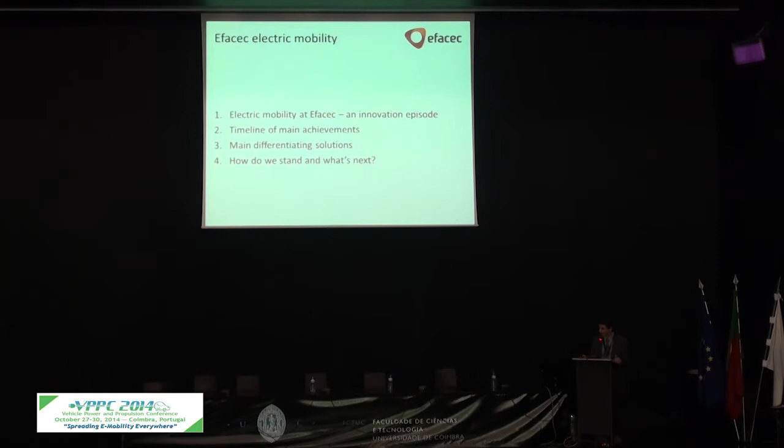So this is a summary of what I will present. First, the history of EFACEC, why we are where we are now. Some achievements, some solutions that are available for the market today, and some of the areas where we are investing more and pursuing more innovation and evolution on the technology side and on the offer for the market.

Okay, just some brief words to start. At EFACEC, we see innovation as a value creation. When there is a change, when there is something that allows you to bring new things for the market, that bring value to the market and help the market to develop, and also that bring value to the company, which I think is very important because it's what this industry today needs. I think we are now passing the phase where it's more academic and pilots and trials, and for the mass adoption of EVs, I think it's obvious that we need to turn this into business and into real economic activity.

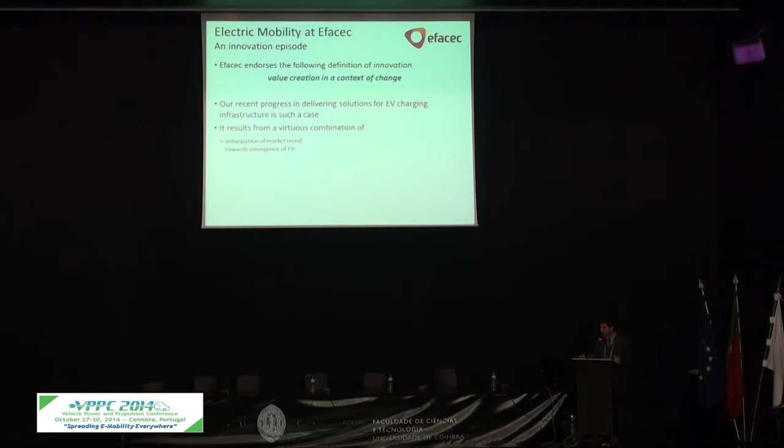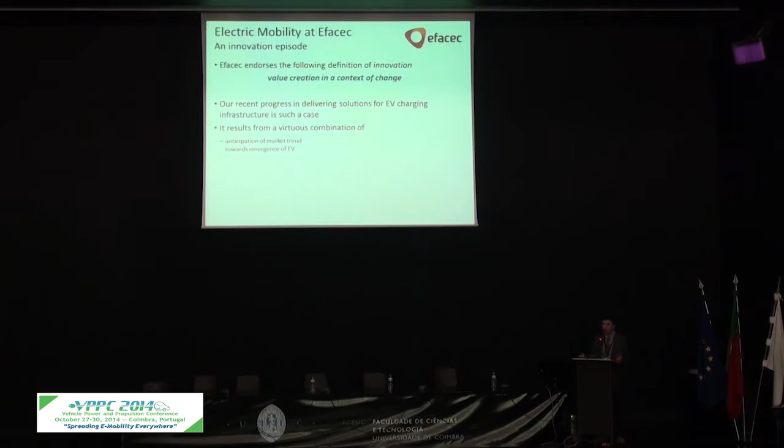So this is one of the cases where we apply this concept, and there is a combination of some facts that led us to where we are now. First of all, an anticipation. So we started to believe that EVs can be an activity with future and that can have good growth. We have an active knowledge management. That means we have a lot of knowledge in the company and with the partners that we work, and a lot of experience in working in this kind of technologies for other purposes, of course.

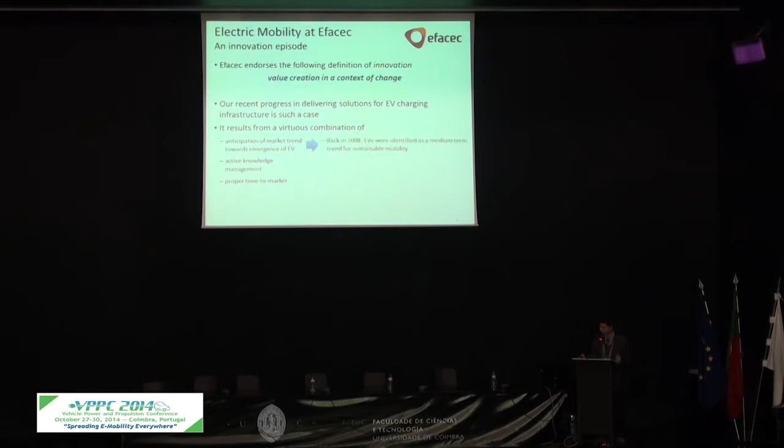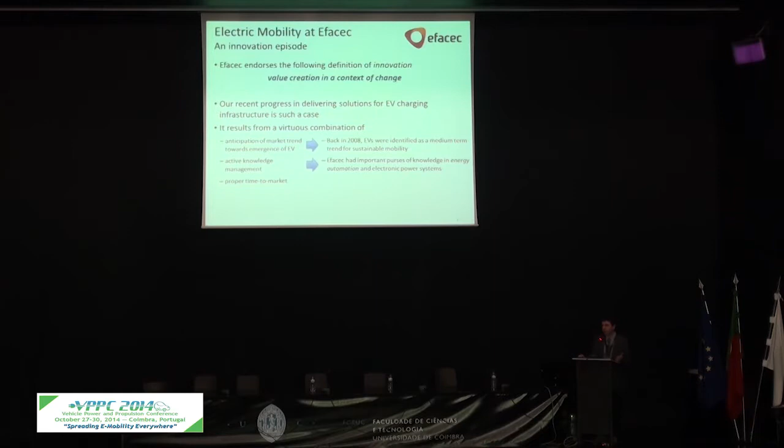Also the proper time to market, so I think we were able to put the products in the market in time, and you will see some examples where we have been the first ones in the world to introduce certain things. And the concretization of this is that we started in 2008 conducting studies on what could be electric mobility. We have an important asset that is all the knowledge and the know-how that we have in the company, mainly in power electronic systems.

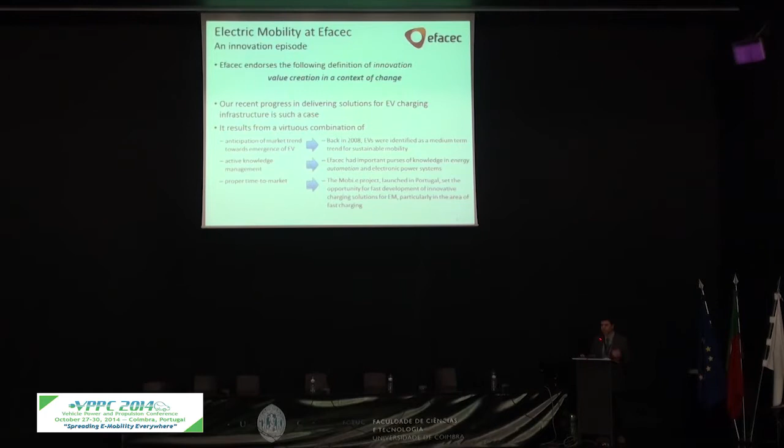And there was a good opportunity in Portugal, which probably some of you know. It was a pilot project that started in 2009 under the big name of MobiE, the brand that was the name of the project, the name of the network, and the name of all the electric mobility program in Portugal. With the combination of all this, EFACEC was able to capture this and to be now present in several areas of the world, as you will see.

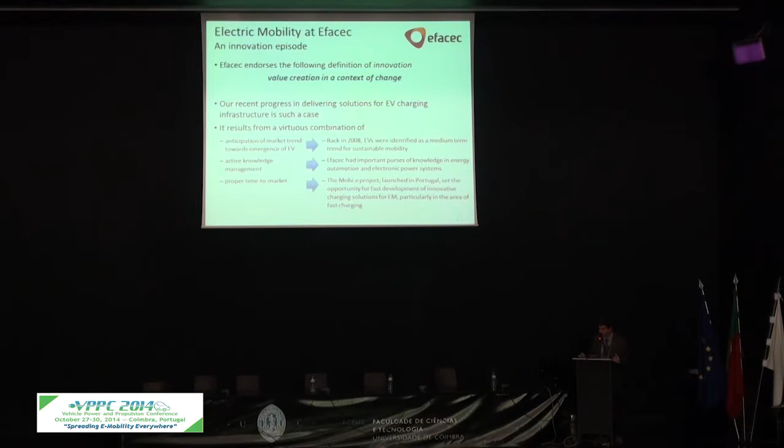So let's start. Back in 2009, part of the MobiE project was the build-up of a system, of a pilot network and a management system, and all the way how this system would work and the model for the market and so on. And this was conducted by a consortium of companies that implemented this pilot project, of which EFACEC was the technology partner.

Just put my glasses. Okay.

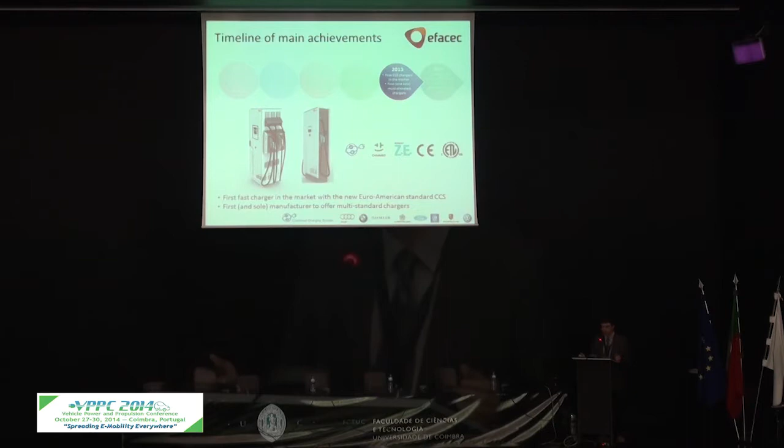So this is an example of a charger with, in this case, 3 outputs, because besides this dual standard fast charging, it has also 3-phase AC output that some cars use. And in 2014, we have a complete range of products to serve different applications, from private charging to public charging, different powers, different standards, DC, AC. So you see a complete range, which is again probably one of the most complete ranges in the market today.

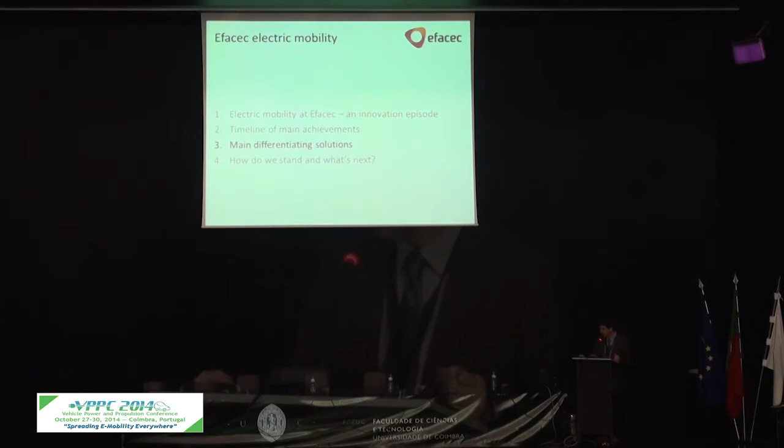Okay, what are the main differentiating solutions that we offer for the market in this area? You see here a full range of chargers. You have from 50 kilowatts down to 3.7 kilowatts on AC, DC, single phase, with management or without management, all different flavors for all the different applications.

We have a strong bet in DC. We have, of course, the AC range, but with AC, you have many companies doing AC. You don't have so many companies doing DC chargers. And so we have a strong bet on DC, where the competition is less, the sophistication is higher, and we have a very, very strong position in the market, and probably we are the number one, or one of the two number ones in the world in DC fast charging.

Just for you to understand, probably you know all this, but I will just recapitulate this concept. Practically every car in the market has an onboard converter from AC to DC to charge the batteries. And so most of the electric vehicle supply equipment, that's the official name in the standards for the chargers, what they do is control the flow of power. So they don't convert anything, they just control the flow. So these equipment are, of course, in terms of technology, more simple than the other ones. The question is that this onboard converter can be expensive, can have some weight and occupy some space, and so it tends to have a limited power.

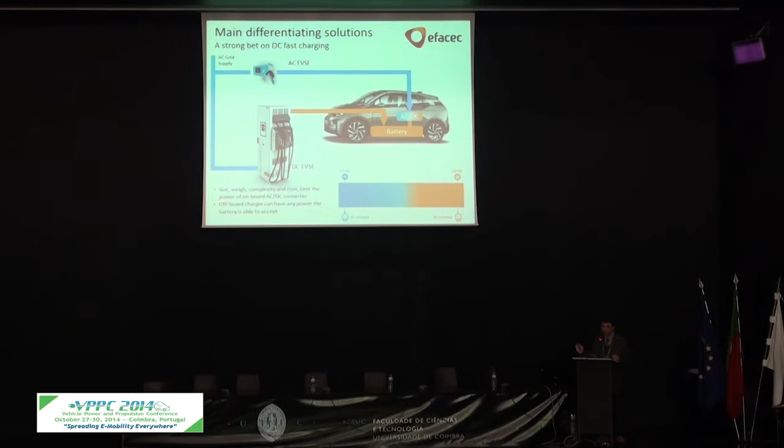And this is how we charge the battery. Of course, you can overcome this by having an off-board converter. So you can put more power in the battery and charge it faster. So the concept is very simple: you put a big converter outside of the car and charge the battery directly. So this is basically the principle of DC charging, and why all charging above a certain power tends to be DC for most of the car manufacturers. There's one car manufacturer that doesn't use this concept, but most of the others use this concept, which is simple: you start with AC for low powers, and somewhere in the middle you change and use DC.

Okay, these are examples of other differentiating solutions. The integration with energy storage, the integration with renewables, all these are areas that we work in, and that can also minimize the impact of the chargers on the network, and even sometimes help the network, because if we have a stationary storage, it can be used for other purposes than just to charge cars. And we have several projects. This is just an example, but we have other projects that involve the combination of stationary storage with car charging.

We also believe in open systems, so our chargers can be integrated in practically any network in the world. If it uses an open standard like OCPP, or if it uses a proprietary standard, it doesn't matter, we can implement it. So the way we position in the market is to be completely open on this. Again, this is the differentiating aspect from some of our competitors that impose a certain interface or impose a certain connection to their own cloud. We connect to the management system of our customers.

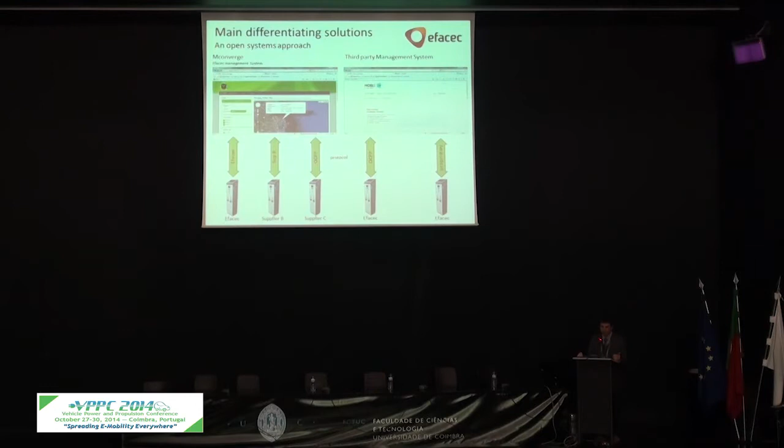And you have here two examples that work in both ways. On the left, you have our management system that can control chargers from other manufacturers. On the right, you have other management systems. In this case, it's MOBI.E, but it can be any other management system, where our chargers can integrate using different protocols. This is the most common, and we are doing this all over the world.

Again, going back to the multi-standard that I presented before, you have here a simple concept of a DC charger with the CHAdeMO standard. You can identify basically 3 blocks there. You have the power electronics, which is basically something that converts the AC into the voltage and current that the car wants. You have a controller, and you have HMI communications and high-level management. And you have internal communications between all of these blocks.

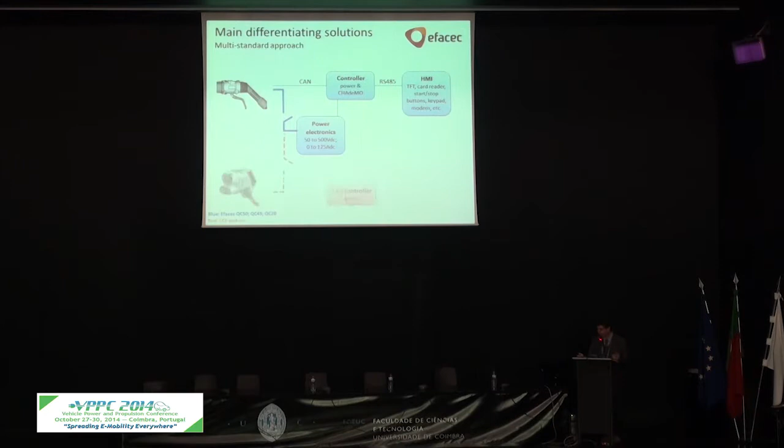So to have a new standard, what we did was simply to add a second output and a new controller connected to the central controller that we already have. So we can choose, using the same power electronics, to use one or other output. We just use different controllers to implement different interfaces with the vehicle. And we have, of course, an internal communication between these controllers.

So for us, it was more or less fast, not only to deliver the new standard, but also to propose the dual standard, which was something that when we proposed this for the first time, nobody believed it was possible, because the standards are so different. We got feedback from many people when we presented this in an exhibition in the United States in 2012. Many people were coming to our stand and saying that you are showing something that is impossible to do. Well, it's possible, and it's working, and it's in the market for more than a year now. And most of our competitors are now coming with this solution also.

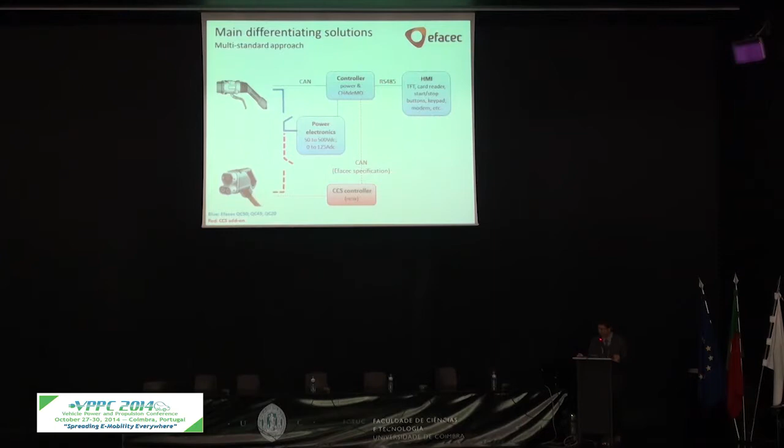Of course, this brings an important advantage for the market, as we believe. That is the possibility to have retrofit on existing chargers that were using the first standard. So, for you to have an idea, a CHAdeMO charger costs roughly the same as a CCS charger. So in terms of investment for the network operator or the owner of the charger it is more or less the same. The revenue that you get with a CHAdeMO charger by charging the cars that are compatible with that standard can be a certain amount per year or per month, doesn't matter.

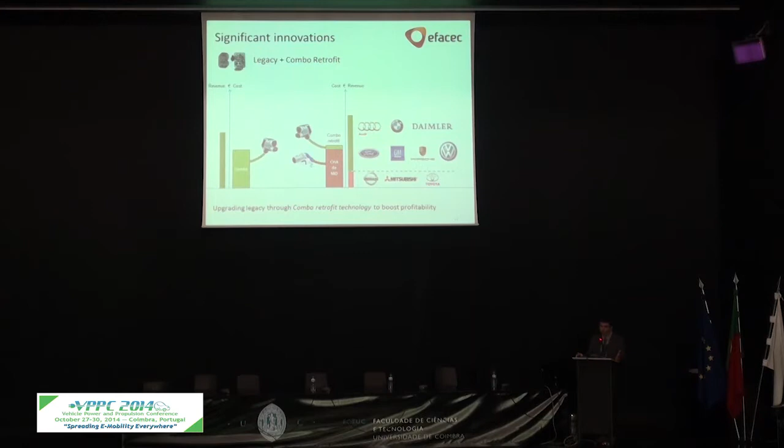The other cars that are using the CCS standard, which are more brands, can bring also some revenue from that charger. But if you combine both, which is if you go to a CHAdeMO charger and you add the CCS charger to it, you will have both revenues combined with much less investment. So this is a good rationale, and I think we were able to convince many people of this good thing of combining the two standards in a single equipment.

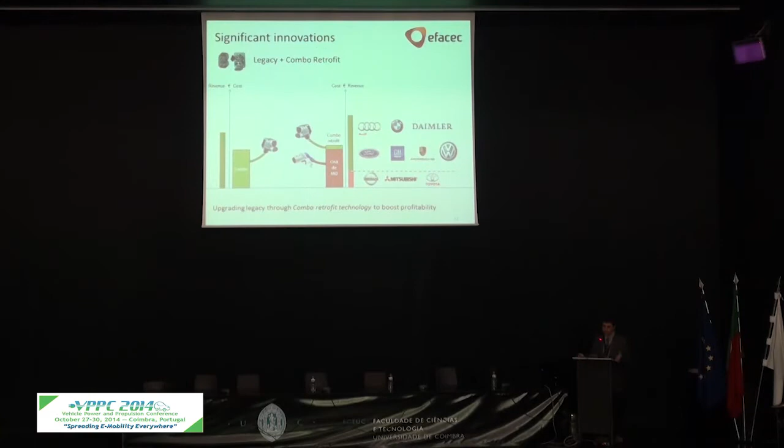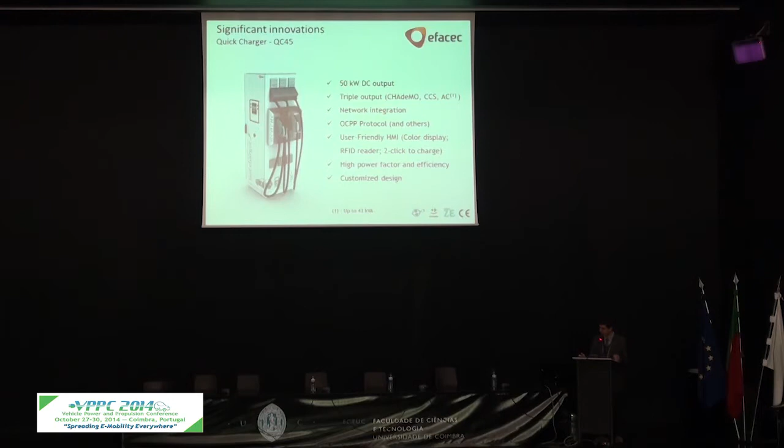And I think it's now completely accepted in the market, and it's even recommended by many people. The discussion was even there for the new CPT directive, where it is stated that you should have CCS in Europe, but it doesn't exclude the other, because you can just combine in the same charger and not exclude the possibility to charge cars that are not compatible with CCS. So this is an example of a 50 kilowatt charger that is in the market, and we have at the moment around 500 units already working in the field in different continents with the combined standards, multi-standard.

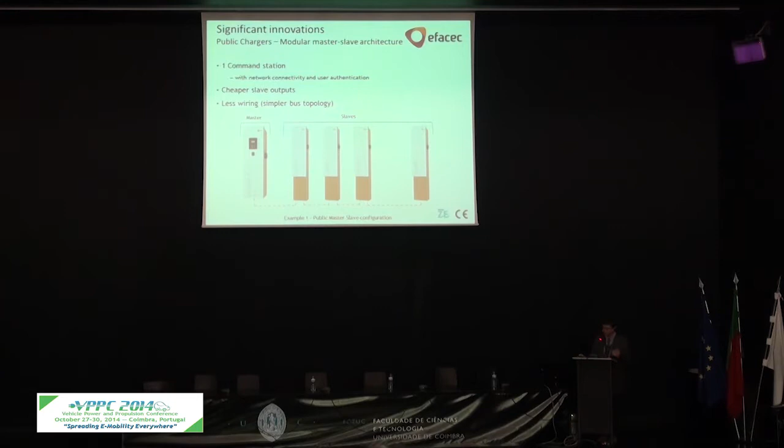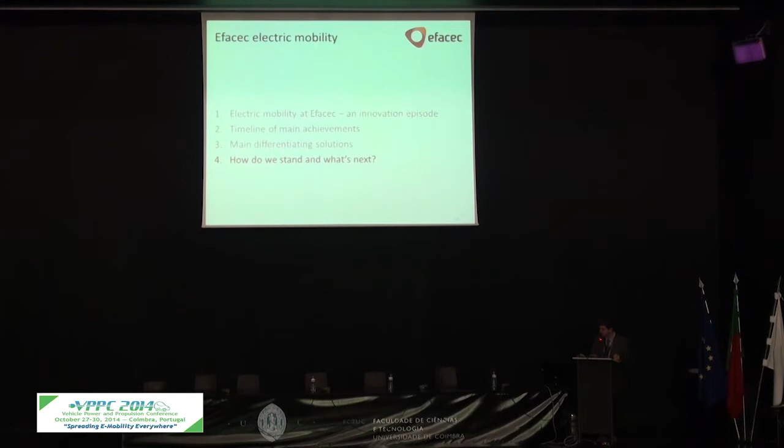Again, an innovation that we developed is to have chargers with the master-slave concept. So you don't need to replicate everything in each charger. You can have a user interface, communications and database and everything in just one station, and then you have slaves or satellite stations of this charger, which is again a good driver for the rollout of different charging stations in a certain area at a lower cost. So another example of master-slave. Just some examples of combination of different equipment in this master-slave configuration.

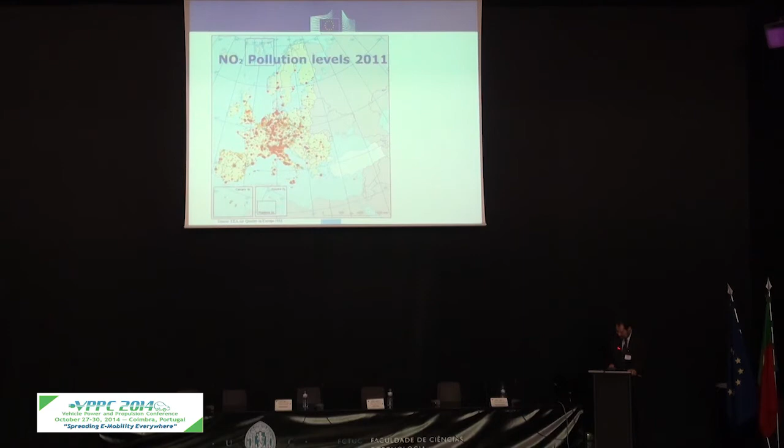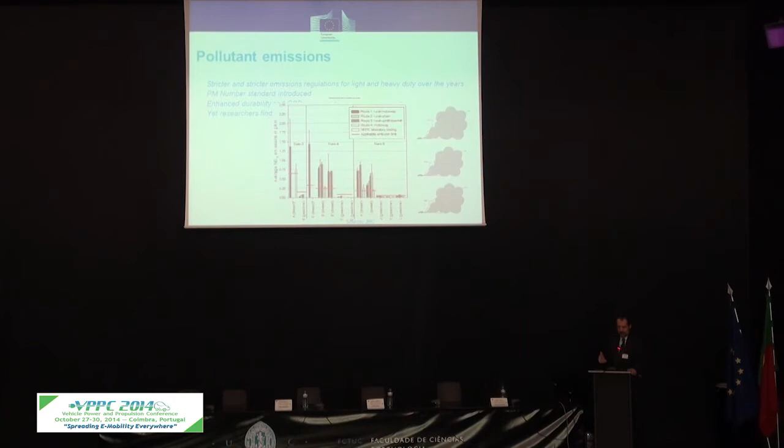So we have to take into account all these things and take into account reality, because sometimes, I am an engineer, but sometimes we have the possibility of losing track of what's going on. So reality in pollution, for instance. This is a map of 2011, it's slowly improving, but I think it's not changed a lot. And we see that we have tried to have stricter standards, we have introduced particle number standards and so on, but still we have proof coming from many tests that the vehicles are emitting much more than they are supposed to, and than they do on the test bench when they are certified.

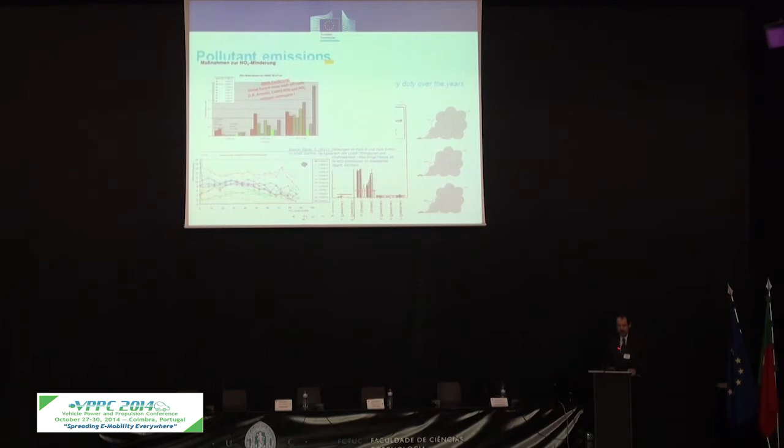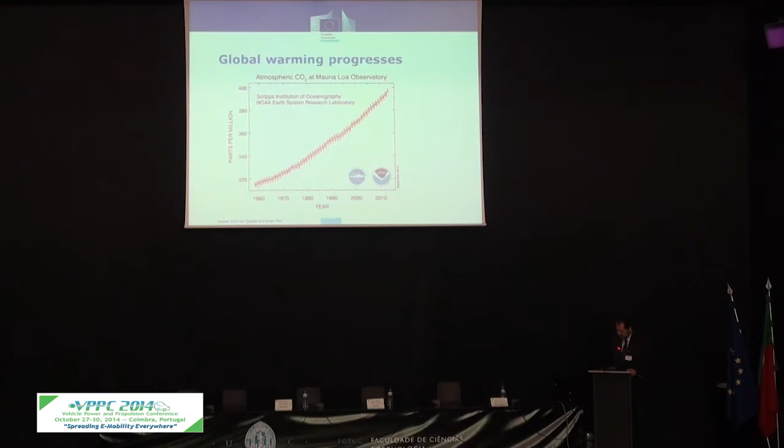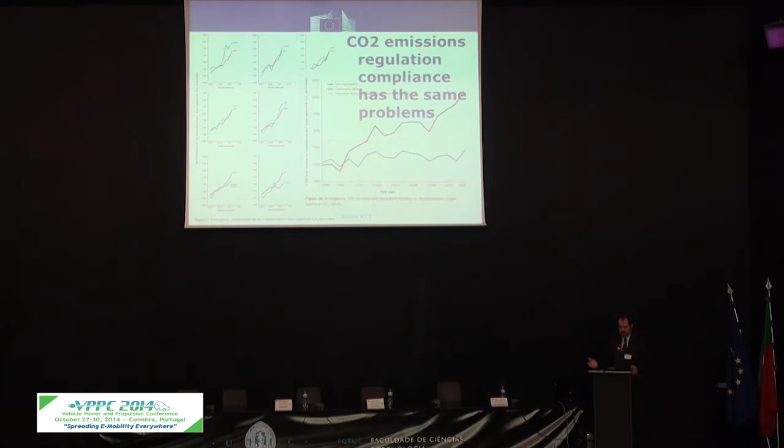So, for sure, we have to introduce real driving testing to make sure that we cover as much of the engine map. At the same time, we have global warming issues, and also there we are trying to put regulation on CO2, and also there we see that there are discrepancies; you see, the difference is increasing with time. And this has been discussed in the press for a long time. These are just a few clips from several magazines.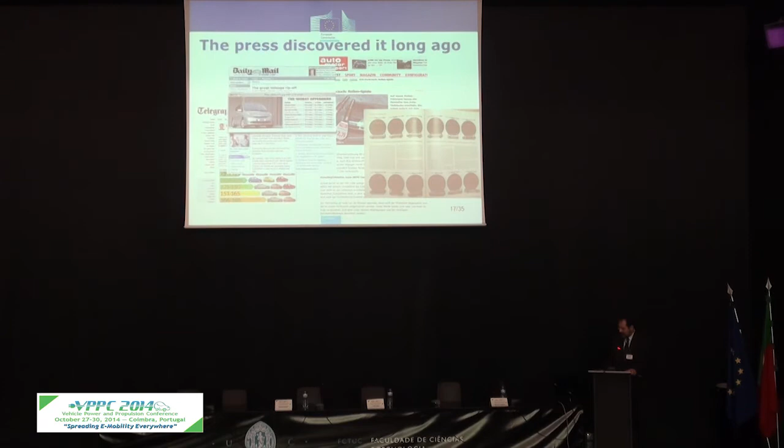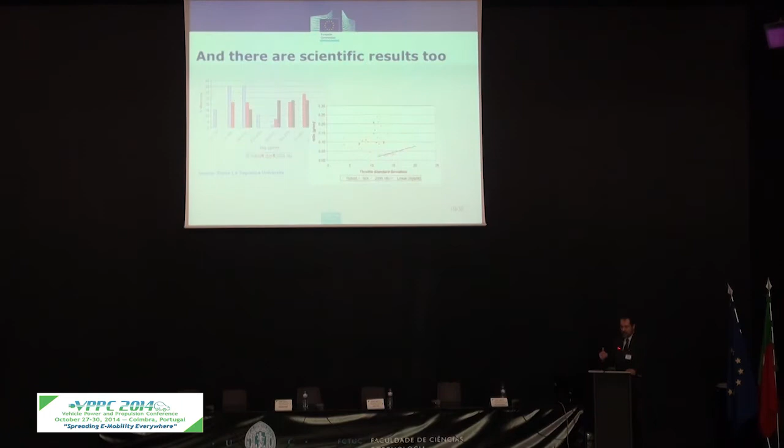But basically, the answer was, okay, yeah, because people are driving differently. Yes, that's true. We've had also some scientific tests showing this, that people are driving in many different ways. But for sure, the differences are getting worse.

So the problem for the industry is that the consumers are starting to react. So we have class actions. This one has been recently launched, so I don't know how many are aware that one has been launched in Europe, while in the US and Canada this has already taken place and they won. So these issues, these discrepancies will have to be taken into account.

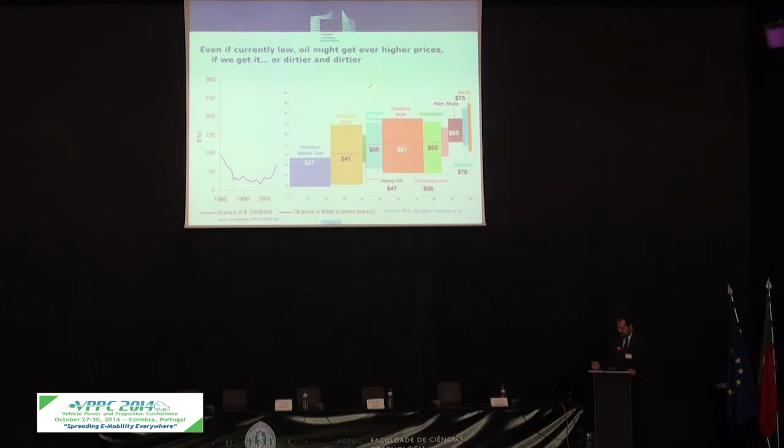And then we have oil. Oil at the moment is going down because of the crisis, because of certain things. But for sure, this graph on the right shows that the oil that we are using today is dirtier and will be in the future dirtier because the easy oil is already being used. So when we do, for instance, the CO2 calculation, I've seen papers on some issues, and I see standard numbers used, which are not realistic.

The oil of tar sands or the shale oil that is so successful in the US takes much more energy to be extracted. So the CO2 emitted when you use it is higher. And probably the more we go into this enhanced recovery, as they call it, the worse the CO2 footprint will be. And of course, probably if the consumption goes on, the price will be high because already at the source it's more costly.

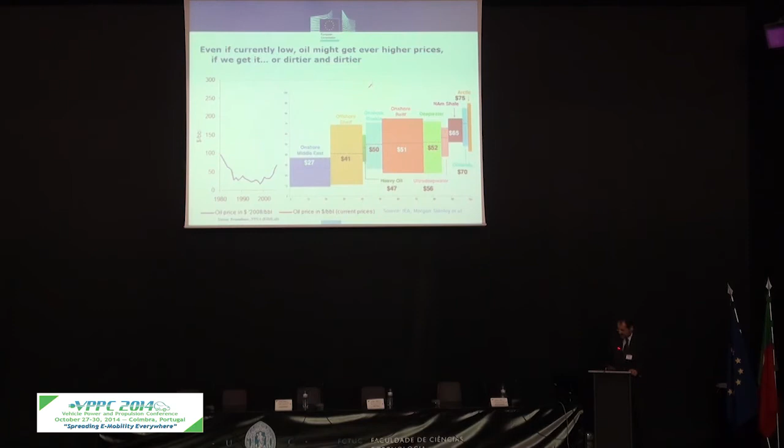So I mentioned competitiveness. Yes, we have European manufacturers which are among the leaders. Basically, in Europe, there are manufacturers that have several models, while many other manufacturers just have a flagship model, and that's it. So in a way, we are, I think, ahead on this. Some of this led to expansion in China. So even if we have models for the European market, there are specific models in joint venture in China. So opportunities for the future.

But at the same time, we look at the sales, and I hear important people saying, disappointing sales. Yes, I didn't expect anything different, frankly speaking. This is a change that really needs a change of mind of the customer. Of course, as has been mentioned, it is a costly technology to start with, like almost all new technologies are costly at the beginning. But in this case, you also have your customer change their way of thinking, of using the vehicle. So to me, it's not a big surprise.

And if I look at the trends of hybrids, for instance, which were an easier sell, basically you drive them the same way as you drive any other car. So they didn't require, other than the additional cost, a big change for the customer. Whereas here you have to think about charging, fast charging, a use strategy, which is something you were not used to thinking about and takes time to accept. So from this point of view, I see this as a more or less normal thing. Of course, we have to work, we have to improve, but again, we have to take into account reality.

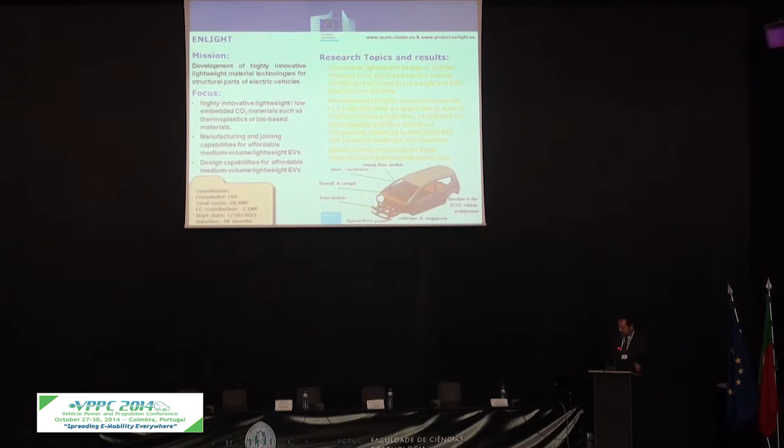Then of course we have looked in several projects at making the vehicles lighter. We have outside a composite car. That's a costly approach. Of course, we have projects like this which are trying to reduce the cost. We have other projects trying to have a compromise between cost and materials and production run, because some materials are giving you good weight reduction, but sometimes you have to either slow production rates or you have to invest a lot in manufacturing facilities. So we are funding several projects to try to get a better compromise.

We have several things on trucks. Most are on conventional trucks because fully electric, particularly for long range, is a bit far away. But we have hybridization, for instance, like in this project, which would in any case help in improving the efficiency.

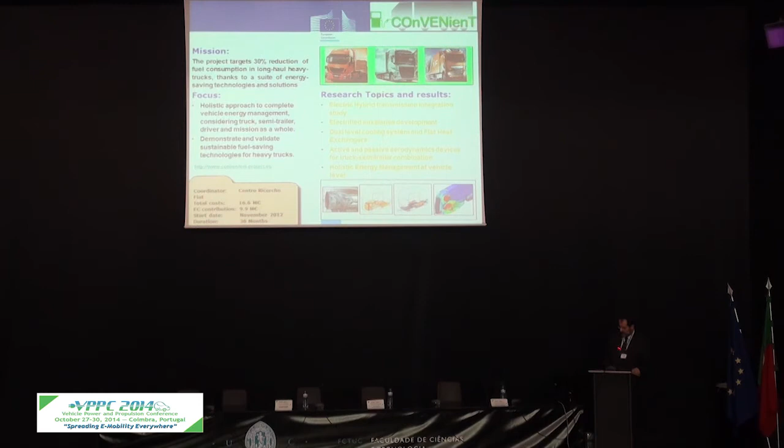And then, just for something completely different, as someone said, this is probably the smallest vehicle that we have funded. Sorry. It should be a video, but maybe.

Well, anyway, the video was showing how it happens, but it's basically, oh, what? Yeah, several times, but it doesn't start. Anyway, sometimes it takes some time, and then it will start.

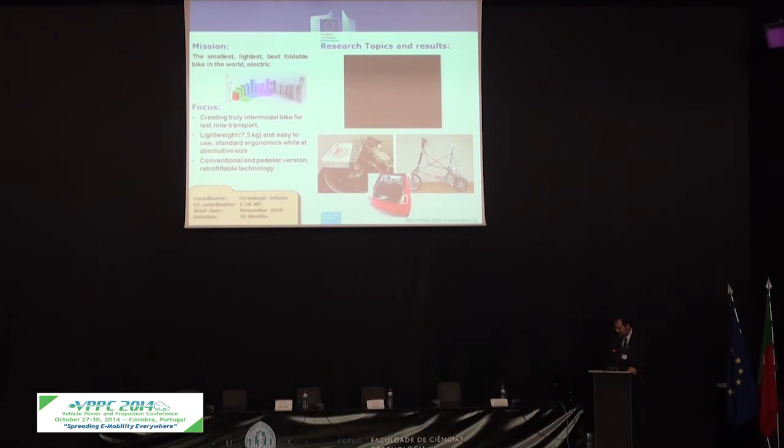Then we had many other projects which are run by the Directorate for ICT, DG Connect. I'm sure many of you have also participated in them. I know them a bit superficially because I'm not involved, but they have looked at control, at dynamics, at the electronic architecture. So it's smart grids, it's more IT oriented.

I also don't want to forget hydrogen because it's something that is still in the electric arena. They share many of the components, so it's a mutual benefit between what we are doing in the Green Car Initiative and what they are doing in the JTI. The first JTI has been completed. They have launched many projects, demonstrators, and so on. They are looking at energy production and early market introduction for some specific applications. The portfolio of projects running is 127 across all areas.

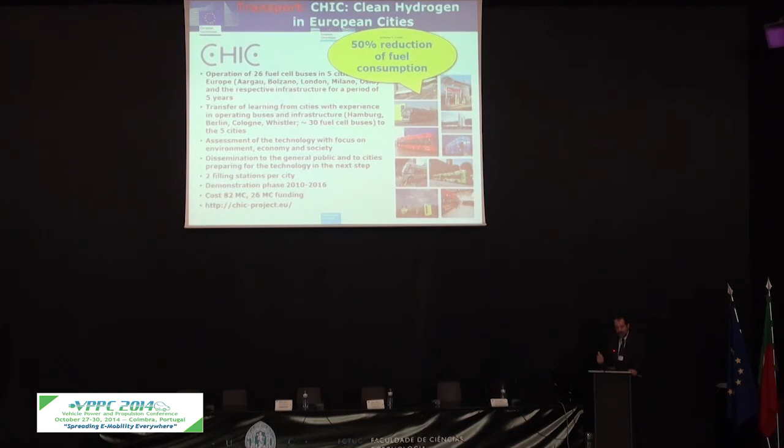This also includes non-transport. And just to give an example, this is the biggest demonstration of buses which has been carried out. Compared to the first ones, they have reduced fuel consumption. And they are demonstrating in many environments, in many cities, what these buses can do.

At the same time, there is the issue of hydrogen production, not only for the greenness of it, but as you can see in the picture, this is a way to have local hydrogen production without transporting it. It's less efficient on one side, but on the other, it could help establish the network. Because, like for electric cars, it needs a network. And hydrogen probably needs much more, because for electricity the grid is available around; you just need to put something in between, while here you have to make it from scratch.

Now, for the future, we had the launch of Horizon 2020. We've had an outline of what we are doing, and we will for sure heavily involve clean propulsion because the problems which are there need to be solved. On one end, we have decided to put conventional vehicles into the normal calls, so to say. We've actually just had a first call with projects on clean engines, trying to solve the problems that I mentioned with real driving.

At the same time, everything which is alternative fuels and alternative energies, except hydrogen, which is the JTI, is in the EGVI, the Green Vehicles Initiative, the follow-up of the Green Cars Initiative. And the focus will really be on application, getting stuff to the market and creating jobs because of the crisis. That's a priority.

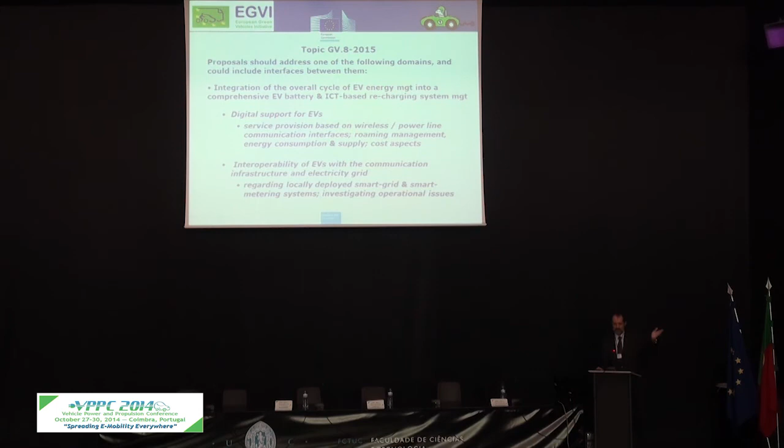At the same time, there's the other topic, which is BMS, so it can be standalone or it can be joined partially with the other one. There it's really ICT and control technology. Of course, we start looking at standardization because we know that that's where cost savings can happen. And at the same time, test methodologies and modeling. And finally, the integration of the energy management at the whole level, including recharging and so on. So this is another area where ICT, for instance the example I said from the French television, should be addressed with solutions coming in a topic like this.

So this will be open next year. There's a lot of time to prepare. The impacts that we want are to try and advance the competitiveness of the vehicle as a whole, its performance, standard-based solutions, and so on. So that's my